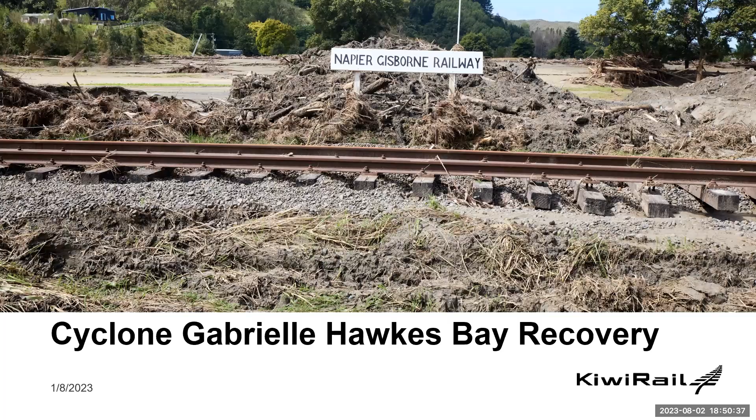Yeah, so as mentioned, it's the Palmerston North Gisborne line. We actually split it up for the recovery into 4 sections. There's Hastings South, so south as far as you want, all the way to Palmy North, and you can read the kilometrages there. Then Hastings to Napier, a much shorter distance, and this is in part how the damage has actually affected the rail and how we're operating right now.

Napier to Wairoa is a pretty significant track length, and then Wairoa to Gisborne is a mothballed section at the moment. So I won't talk about Wairoa to Gisborne much, other than right now we have what's called a duty of care, with it being a mothballed line, as to how we make sure we don't have any damage from neighbour properties into the line that detrimentally affects us, but more so how we make sure we don't detrimentally affect our neighbours—there's lots of farms and roads, like Nuhaka up to Mahia, that local communities rely on.

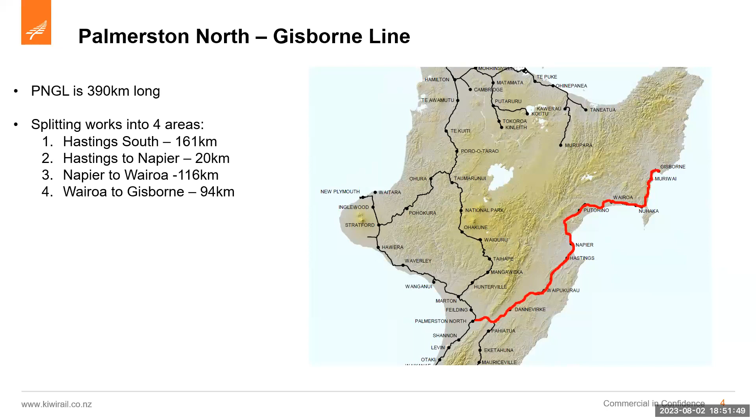So going through these sections now: Woodville to Hastings, there wasn't much in the way of damage through the Manawatu Gorge. Generally it started at Woodville, and that piece had over 100 damage sites, or in the order of 100 damage sites, south of Hastings. But as I note here, there's only one major damage site. In terms of minor, moderate, major, extreme—those will get explained in a bit—but only the one major site, and that's Bridge 176.

So you can see the section on the photo there between Bridge 176, which is a road under rail, and that got washed out between that and Bridge 175, which goes over the Waipawa River. So what I think of as Central Hawke's Bay—when you're driving over the Waipawa, you'll see the rail just before you get to the BP. That was all completely washed out, a reasonably big section.

And that was the critical path for reopening to Hastings, which we have done. We reopened to Hastings at the start of April, and we set up a road bridging site in Hastings to take freight to Napier. There's still a bit of work remaining south of Hastings—in the order of several million dollars, not several tens of millions for the damage repairs, but moderate to minor things around it at the moment. That means we can safely run trains.

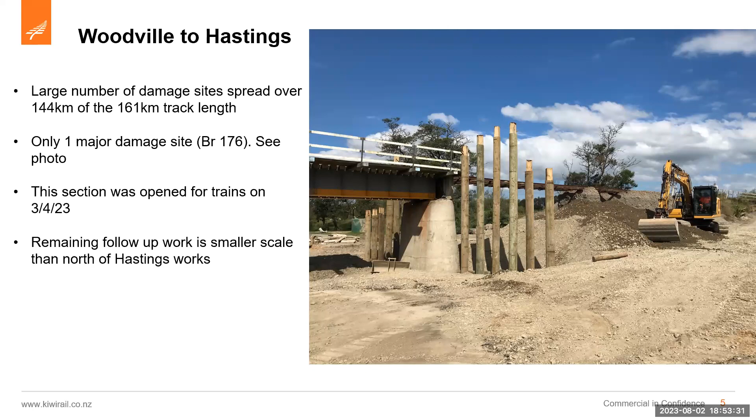Cool, now moving to Hastings to Napier. There were a small number of damaged sites where ballast has been washed out between Whakatu and Timona. They've all been repaired really quickly, but the big site is the one in the picture here, Bridge 217. I'm going to talk quite a bit about this one in a bit, so I won't go into too much detail now, but that's the whole reason we're not open to Napier.

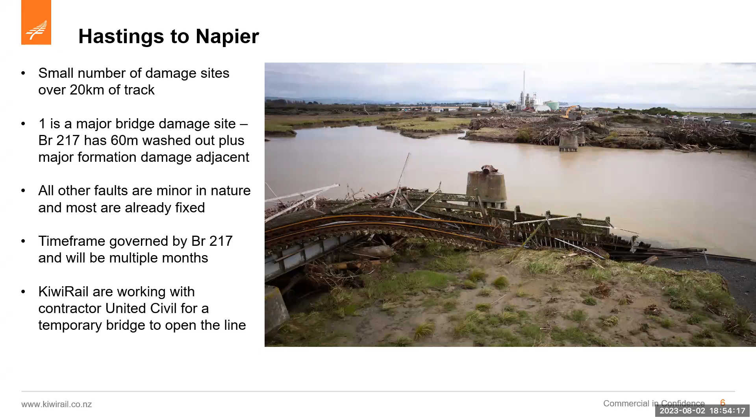And timeframes for getting open—it says multiple months here. Last month it was multiple months when it happened, but yeah, we're planning to be open next month. United Civil is our contractor. See Don from Navara here and Mark from Aurecon—they've had people involved in the design teams for that too.

Then we get into the real big stuff. So between Napier and Wairoa, and 116 kilometres of track, some of it's pretty challenging even before the cyclone. So we split it here into 3 sections. I'll talk about those in a bit more detail.

Sometimes people use these terms interchangeably, but in Hawke's Bay, Eskdale is generally an area that people know. Esk River is the separate piece, and then Tutira to Kahika. I'll go into those specifically in a bit more detail now.

That's Bridge 222, the Esk River Bridge. I think that was renewed in the 1938 floods that came through Esk, and it's a reasonable sized truss. We were out there with one of the contractors getting involved in the alliance, and he said, is that your biggest bridge on the line? I said, bro, it's not even in the top 10 for this piece of the line.

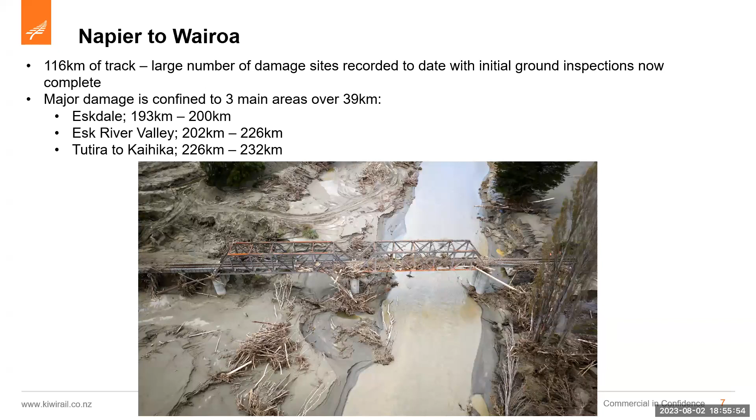So we've got a reasonable number of viaducts, in the order of 10 or so on the PNGL. We've got the biggest viaduct in the Southern Hemisphere, the mighty Mohaka Viaduct, 98 metres high. I can't remember if it's 300 metres long, but she's pretty significant. Then you've got Ormondville, Kopua south of Hastings, Waiheke, and a couple others I've forgotten the names of right now. You've got some massive structures north of Napier, so yeah, it's a big bridge, but not for Napier-Wairoa standard.

So the first area, Eskdale. As you're coming out of Napier, for those used to driving it, you go north through Bayview on State Highway 2, then take the turn off to Taupo following State Highway 5. The rail takes that same bend, and we go through Eskdale. It's about 7 kilometres long, and we are really close to State Highway 5 in some parts, and 100 or so metres apart from State Highway 5 in others. We class that whole area as an extreme damage site.

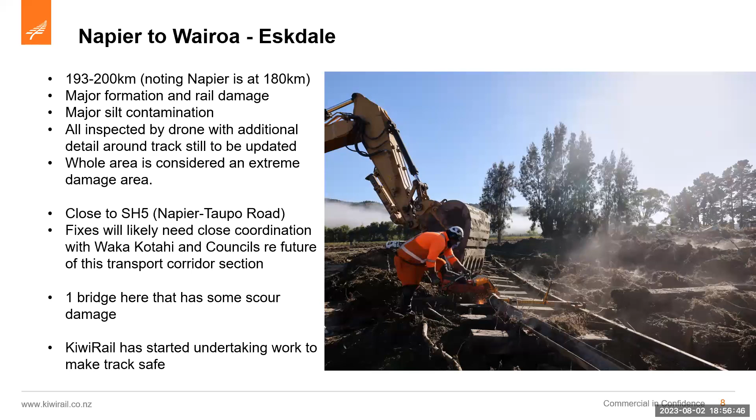So a picture there of one of our guys, Taff, cutting some rail. I'll go into this in more detail, but the entire rail has either been buried in a couple of metres of silt or been washed out there. And there is one bridge up at Munns Creek that's got a bit of damage to it.

Esk River Valley. As you're going to Taupo on State Highway 5, you'll leave the railway, and the railway goes up the Esk River, keeps going up the valley. It's in a situation a bit like this, for the civil engineers, we call it a sidling cut. This is where it's not going to be so good for those online. That's Alice Wallace Road, a local road.

It didn't actually have a bridge connecting it before the cyclone, just a ford, so it's not a particularly heavily used road. There's the rail underneath, and that's the Esk River down below. So pretty limited room, and lots of notes there about how the track sections are broken up with damage.

But we've got about 8 Ks. We've got a local road above us, and then we've got nothing until you get to a little place called Waikoau, and then you've got another local road. So it's just native bush or forestry and maybe some forestry tracks, but for a lot of it, it's just the railway. Access is a big problem then. You've got a reasonable number of tunnels, I think there's 3 or 4 through there, and at least one other big, not enormous viaduct, but big bridge.

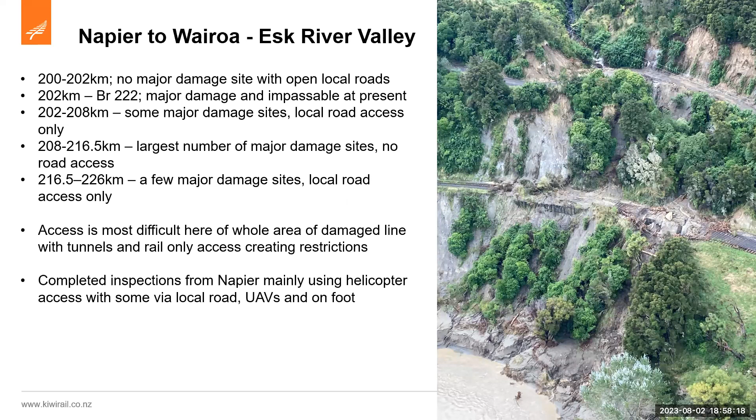Just the last point I'll say here, we've inspected all of this area, and this one was pretty full on. So this was lots of flying people in helicopters and dropping them off for the day, and then they walked to get to all the sites. Reasonable amount of use of UAVs, bit of local road, and again, lots of walking.

So as you get to Waikowai and then to Tutira, people generally know Tutira, Lake Tutira, the song - won't try and repeat it, that's where it's from. You've got one massive damage site, the biggest on the whole line, that's the picture there. But it starts getting less after that - that's Tutira to Kahika. The other point here is we are closer to State Highway 2 once you get to Tutira, we're not always in sight of it though.

So I get asked this lots, the difference between this massive disaster in Kaikoura - we were within sight of State Highway 1 for most of the biggest areas, not all the way, not to Conway, not where Amuri and the Hundalees are. But here we are close, but not tight with State Highway 2 to Tutira running north.

But this damage site I'm showing, it was a 1.5 by 2 meter arch culvert. It's an arch because it's built probably around the 30s, about 15 meters deep, and farmland on either side, possibly a couple of ponds that blew out, and it's blown out. So it's 15 meters deep, embankment washout and about 55 meters long. That's the biggest embankment washout on the line.

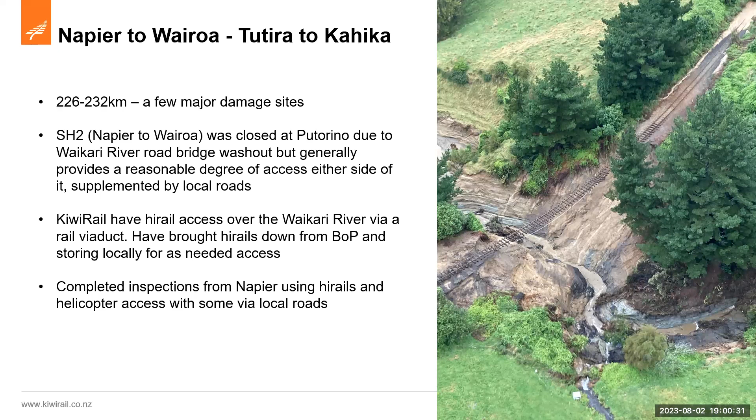To go and inspect was pretty challenging, but we actually, for this section, we brought high rails down from Bay of Plenty, because to get to Tutira you go through Devil's Elbow and Tangoio and such, and that was all cut off massively. But we could bring high rails down from Bay of Plenty, and at the Putorino over the Waikari Gorge, our bridge was open, our viaduct was open, but State Highway 2 is completely washed out. So we're bringing high rails through, we're talking to locals and Waka Kotahi about them using it for access while they were getting the Bailey Bridge back online. Never really panned out that they needed to use it, but we had high rails stored at a farm for people to use if there was a need, as well as our teams.

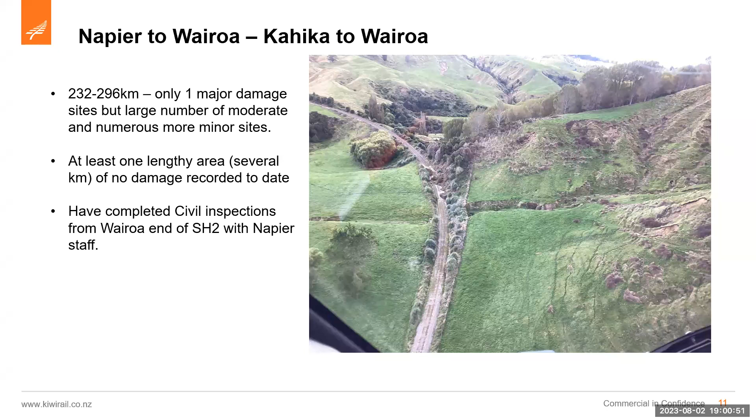Then you go Kahika to Wairoa, and don't want to sound blasé about it, but it's a bit more like any major storm incident. So there's 7 kilometres section with no damage, and then there's a few minor moderate ones, but it is nowhere near the scale once you get north of Kahika.

So what have we been doing? So that's the damage. Like I said, we've opened to Hastings, and that's Bridge 176. This one that's been repaired, abutments all rebuilt, and that job's finished. But we do have, like I said, quite a few other jobs.

This is, I can't remember which viaduct this is. I don't think it's Kopua, but there's a reasonable bit of scour, slips around some of our big viaducts, quite a few drainage channels and such that need a bit of work in small scale slope works. But it is a scale less than what's north of Hastings.

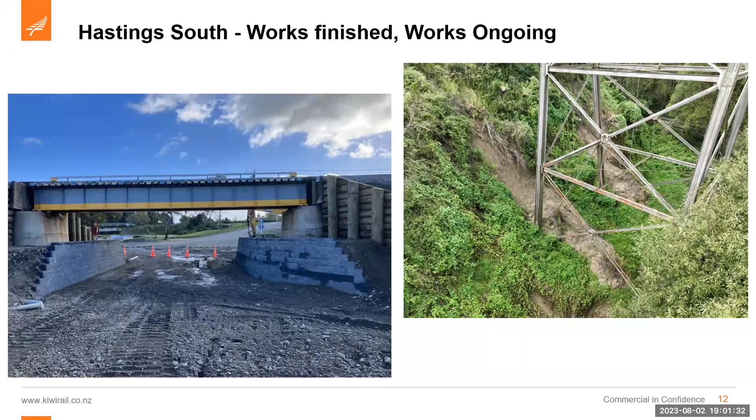So what's north of Hastings? Going to concentrate on this area, and probably gone a bit heavy with the slides, but I find it just a fascinating area. So before and after. Before is green, after is brown with all of the silt.

Let me just point up here. This is Bridge 217. This is Bridge 216, PNGL, and State Highway 51 - the old State Highway 5, State Highway 2, sorry. But I'll skip to the Ngaruroro River, Tutaekuri River, Waitangi Stream. Hopefully this one - and this is again some before and afters - I'll just talk through the whole, some of the history of the rivers.

So the railway built here in 1870 between Napier and Hastings, moving south, trying to get down to Palmerston North, wasn't heading north at that point. The northern piece comes in the 1920s, 1930s, and goes over the Waitangi Stream at the time. And there's a few rivers around there. It's not till 1897 that we have a bridge there.

And we have a bridge there because there's a massive storm, big flooding, and the Ngaruroro floods, and 12 people are killed at Clive. And the railway is washed out at Waitangi. And so the bridge that's built in 1897 is called the Waitangi Washout Bridge.

I said to Murray, I might mention this - I met a guy when I was reasonably young, growing up in Hawke's Bay, who had been in the storm, lived at Farndon, which is at Clive. And when I said that to Murray, he said, oh, well, my grandmother was on the bridge at Clive because he's got family from that area. So you think 1897 is a long time ago, but you meet people that lived through it, or you have family that lived through it. So it's not that long ago.

Right, so 1897, we built a bridge. 1931, you have the Hawke's Bay earthquake, kills about 89 people in Hastings and over 100 in Napier. Massive uplift, and it causes problems with the rivers, massive problems in Esk, but also around here. So before the earthquake, the Tutaekuri - this river.

I like telling this story because we've got some problems now that aren't just for rail to solve. Rail shouldn't try and solve them alone.

So that's Awatoto up the top, the Maraenui golf course. You can just see past a bit of water there. What's happened is a massive amount of water and debris has backed up across the Waitangi Bridge and washed it out. It's protected State Highway 51, but while it's been getting damaged, the stop banks at Awatoto have completely gone. The Tutaekuri has had three road bridges wash out further upstream, and it overtopped its banks in quite a few places.

Two people were drowned around the Tutaekuri. And the Ngaruroro, which is not in this photo, has overtopped its banks. It didn't fail, it's overtopped and it's flooded too.

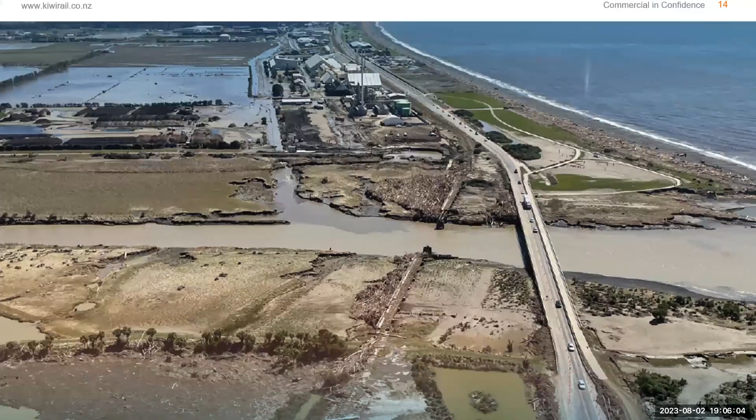Just check out that area - I measured it, that's 3 kilometers that the water has gone where there was no water before, just a little stream. It's gone 3 kilometers all through Ravensdown, all through the tannery, the animal processing plant. It got right to the golf course, and it became a massive contaminated hazard zone. When we were going in there, you had to wear hazmat suits and they'd wash your vehicle down before you left because of all the contaminants there.

That water sat for months afterwards. I think it might mostly have drained out now.

So it needs a whole of Hawke's Bay approach. It needs all the agencies working together, because Awatoto got hit by both the Ngaruroro and the Tutaekuri coming through. What are we going to do about all of these rivers and such? Just building the rail bridge back where it was - that's not going to really address any future problems.

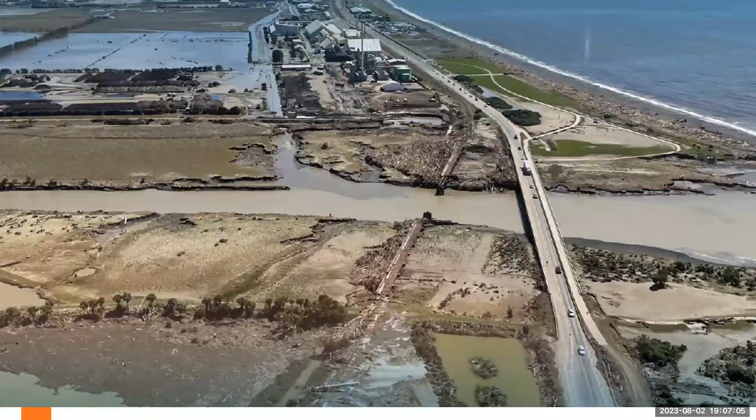But we need to get open. So what have we done? We've done some temporary works to reopen our bridge. We keep lots of spare rail spans, we call them spare spans. A really common length in rail is 40 foot, 12.19 meters, because that was just the length that was getting built when we built most of our rail.

We've got 6 of our 40-foot spans, because 5 40-foot spans here got washed out. There's one, there's another, and we think the other 3 are in the Pacific. We've actually done a bathymetric survey of all of this and haven't found any trace of them around here, so we think they've washed all the way through.

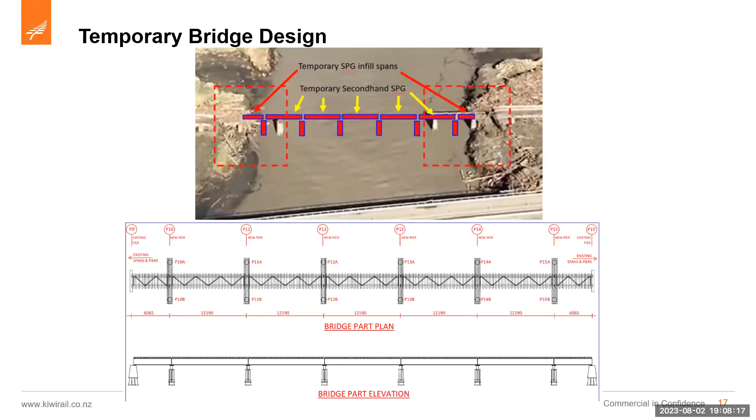So we've taken 6 spans and we've cut one of them in half, and that's to create an offset of the existing piers. Three piers completely washed out and a couple are damaged, so we've offset from those and are placing the 40-footers. That's United Civil, and they've been working with Subbies, Hawke's Bay Civil Construction, Spiral Drillers, Eastbridge - lots of people know them in Pandora and Napier. And like I say, Novare, Oricon, and a few others - sorry if I'm forgetting some.

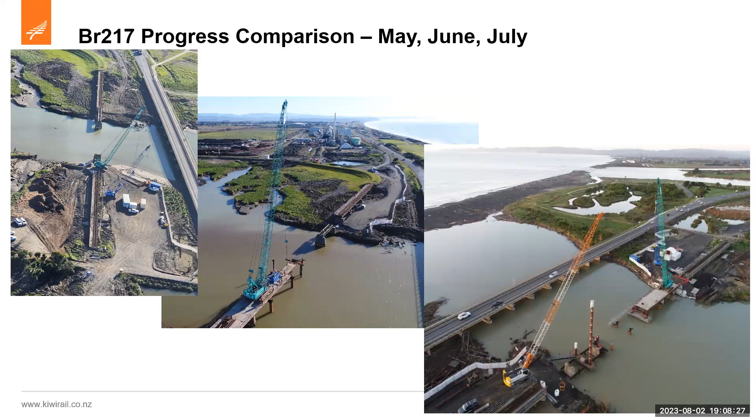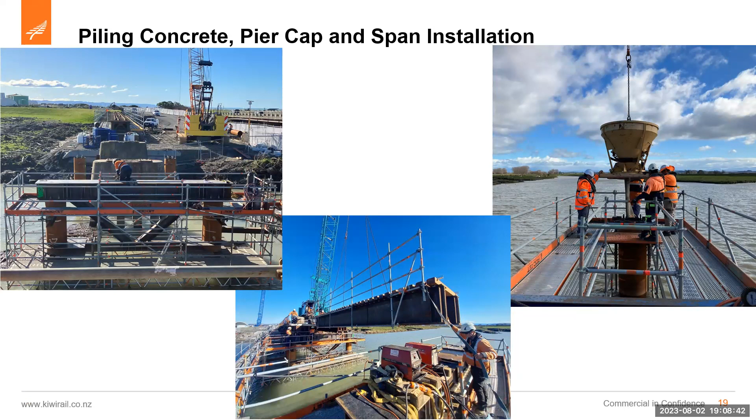This is how it's going, there's the progression of works. They've got a really cool process of staging and working from both banks. There's them doing some concreting of the cap, concreting over there, putting the cap in and lowering the span. You can see it's a reasonable stretch of water that they're working over, so it does have its challenges.

Here's the schematic - they were working from the north, from the south, working north with staging, and another crane on the north bank just to get it done quicker. That's where we were about 3 weeks ago. We've got 3 spans in now.

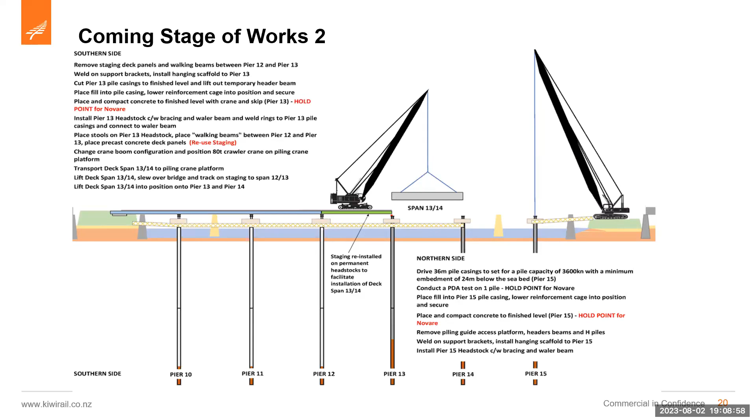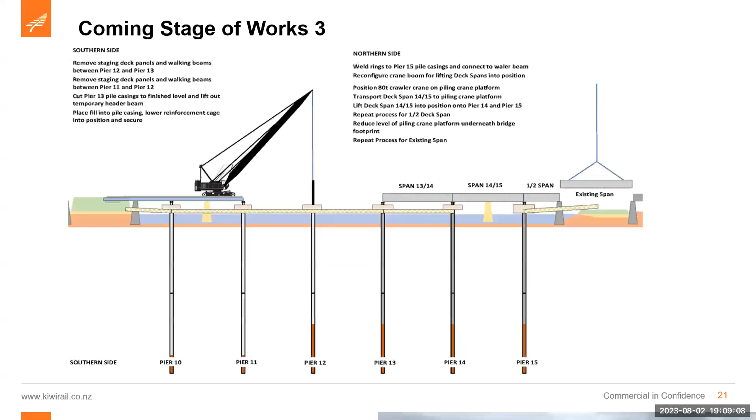So it probably looks a bit like this out on site at the moment, and they'll be working their way back. We're aiming to open at a point to be confirmed in September.

Now the next big site I'll go through is Eskdale. So Eskdale is pretty full on. That's Pete Marsh, our ganger, who works between Napier and Wairoa. He's at a patch we call the Strawberry Field. All three of these pictures are from there.

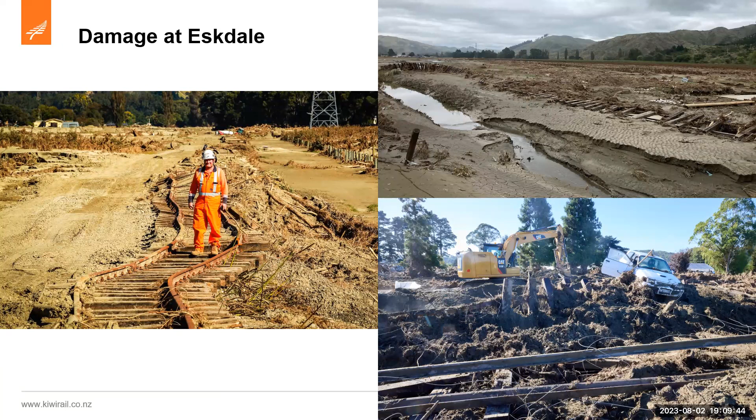So one of those places wasn't there before. This one, the car, that obviously wasn't there before either. So the rail's just been massively pushed around, and trying to give context to that is quite hard. It really helps to walk the area, but obviously I can't do that with yourself.

So it managed to get between this guy's place - I've met him a few times, so he's obviously pretty devastated by the damage to his entire bit of land. But there's another bit, and it came down and it's bent in half, and it's managed to get a car impaled through it. You just think, boy, the strength of that, because rail's not that light. And it's hundreds of meters of it that's been carried.

Another thing, there's a few vehicles. This was all orchards and vineyards, so thousands and thousands of posts. And you now go out to places and you can't recognize any landmarks. I was standing with a guy further down, the guy that owns the motor camp, and we're on top of what felt like a World War I barbed wire barricade, because it was all the posts and all the wire curled up, and that got dumped on his property. So he's thinking, what am I going to do about this? But he's looking at his land that is like this. So it's all zoned not fit for residential use, but it was people's livelihoods - orchards and other things.

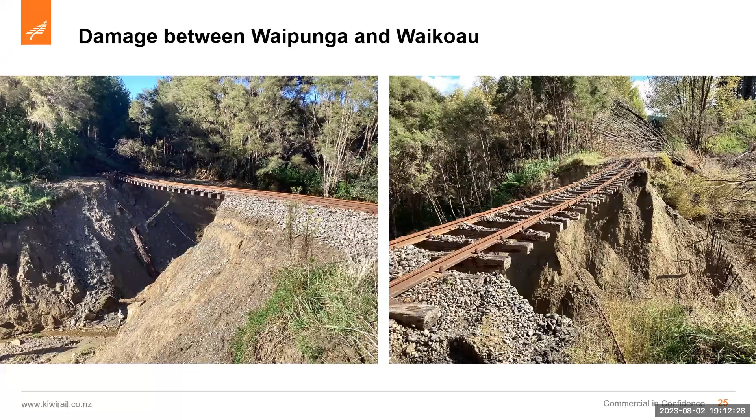So that's quite a different type of damage than what we had in Kaikoura, where we had massive big slips. So they're now going into a bit more of the recovery phase.

So what are we doing north of Napier? It's been a huge exercise in planning and damage assessment. I mentioned the moderate major sites - we've got a way of classifying them that we started doing in Kaikoura. We actually started doing it into the 2014 Manawatu floods, and we've been progressing that using mobile apps and such. Using Survey 123, the software we used this time, we compiled a huge amount of data.

But I'll just lift the curtain a bit - it didn't go that well at first, because you'd think we'd just grab all the stuff that we did in Kaikoura, but we've got different people involved, different IT systems and such. So some of the software licenses that we had in Kaikoura, we no longer had. And some of the people that started getting involved straight after, they went down to Cheviot, they went down to Blenheim and such to do it.

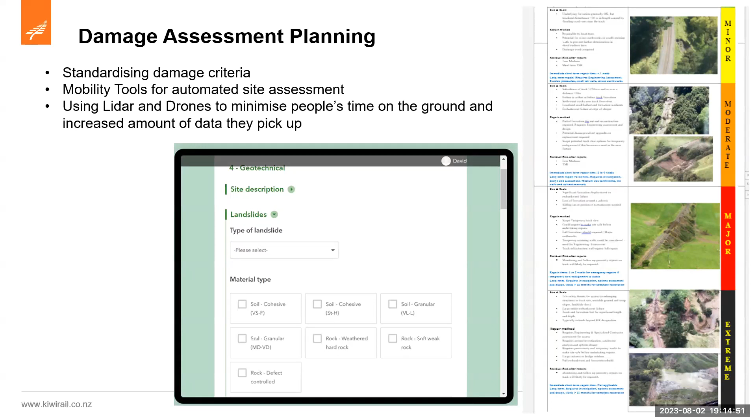I led the Kaikoura work, and we did probably half the level of assessments in twice the time. In detail, with 800 inspections, 600 reports, 400 damage concepts created out of this, that was compiled massively quick once we got this going, because KiwiRail's hugely invested in digital tools and digital technology. Some of those weren't used here, but you've got a bunch of people that know how to develop things really quickly. They're given a problem and they'll look at it from a different perspective of rolling it out with digital devices, and they did that really quick.

And it enabled it all to be on GIS. So I was going through Waka Kotahi's damage GIS database today, or mapping, and it's exactly the same. There's a couple of differences in colouring and such, but they use the same Survey 123 reports, and they're actually using the same four criteria, because I'd had a bit of a look at what we're doing and went, yeah, that's going to work for us. So they're trying to standardise to that.

But just like Waka Kotahi does, they've got a bunch more grunt behind it, and I've seen some of the stuff they're doing - it adds to this. So that's something I'm quite excited about, that we're working with their team as to, can we create a process for land transport incident responses together, and they're open to it. And yeah, I just hope KiwiRail are as well.

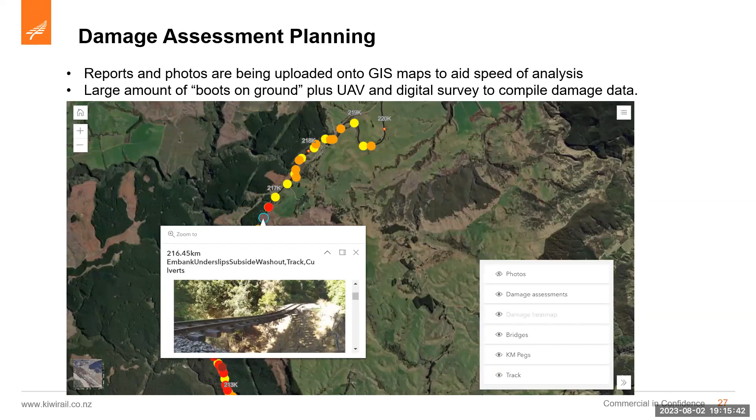It's just a little bit flasher in some ways; in other ways ours is just as good. But we've mapped it to get quantities and measurements and stuff massively accurate. The use of drones has been great, and you don't need to put people anywhere near as much in harm's way. We still have walked all of this, but doing the drone surveys first and then working out where to put people has been hugely helpful. We still do LiDAR, but the drones add that bit more detail.

And I'm coming to the end - I'll just go back to that last one. We're working with TREC, so you asked for an acronym - TREC is the acronym for the Alliance, Transport Rebuild East Coast. KiwiRail's part of that. We're working with them, taking the information KiwiRail compiled to now - we did concepts for it - to now progress that.

And how long is this going to take? How much is it going to cost? What are the right solutions for Napier to Wairoa? We're also working with TREC on what's the permanent solution at Awatoto and possibly some of the stuff south. I should emphasise it as a temporary bridge south of Awatoto, because we could get back a year or so quicker by using that. But to get the right flood flows to allow for the stop banks, State Highway 51 - what's going to change with that?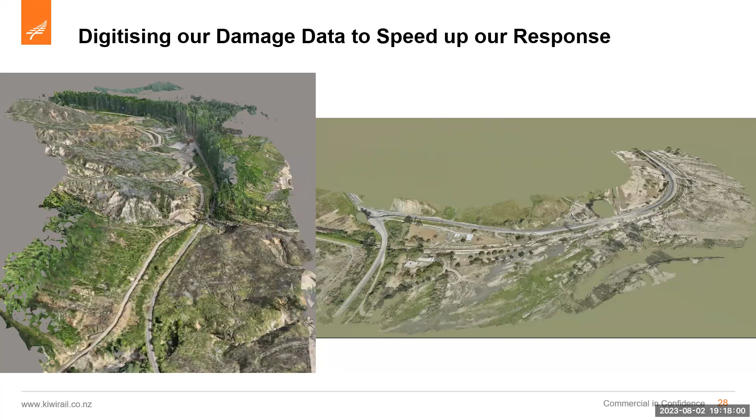We need to give ourselves, Hawke's Bay Regional Council, Waka Kotahi, time to work on it. On a fun piece, that waterway is the boundary between Napier City Council and Hastings District, so we want everyone involved in that one. TREC is doing a massive amount of planning now to get itself underway, and at the same time KiwiRail is doing something called Make Safe. So all of this damage isn't going to last without changing over the winter - the winter we're in right now and the winters and storms that come in future.

Just some context for that: this is up a bit south of Waikowai, taken in February, around the 8th. Sometime in March that blew out, causing a few million dollars more of damage. You couldn't get any vehicles or forestry gear in - forestry gear was actually trapped further south and couldn't get out. So we had no way of stopping that happening.

But now we want to stop that happening - we want to stop road and rail bridges getting affected by debris on them. So we've actually cleared all of this at Munns Creek with Waka Kotahi. In places like Esk, and more so in Wairoa, we're getting drainage channels and stuff reopened. Wairoa has been flooded quite badly since the cyclone because things are blocked and different up there now.

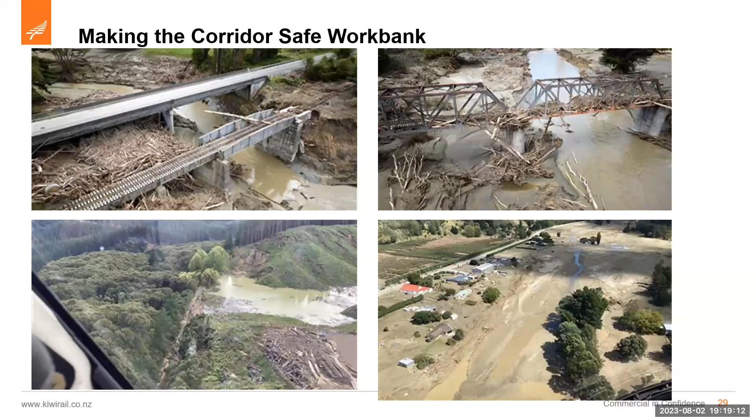I'll just finish with this one because I quite like it, as a bit of an indication of what occurred. Cyclone Bola washed out State Highway 2, which connects the north and south banks of Wairoa town. That's why this truss is different - it got converted into a road bridge. We've got an idea of where the water came up in Bola and other events, and it was a reasonable way beneath the truss.

The same happened in the '38 storm - we know where the water came up to, and it's a couple of meters lower. You can see where it's come up to here because we didn't put all of that there ourselves. I've seen some video someone took the next day when the water was still up, and it's incredible how much water is cutting down these streams.